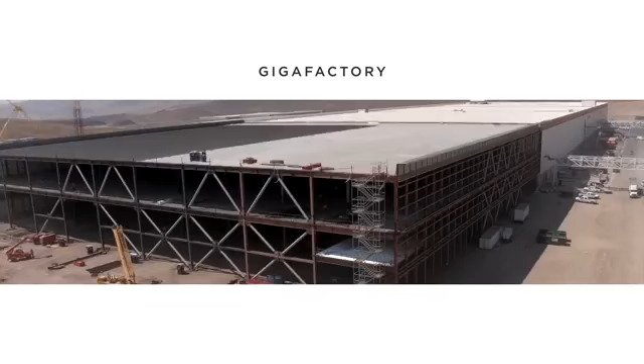The basic math was that in order to make 500,000 cars a year, we would need every lithium-ion battery factory on Earth - that makes batteries for phones, laptops, cars, everything - just to achieve that output. Clearly that's not being built, because you'd be able to see it on a satellite picture. So either we figure out some way to build this thing, or there will not be the cars that are needed. We kind of just said, okay, we got to just start building this thing, and hopefully people will buy into it and start to believe.

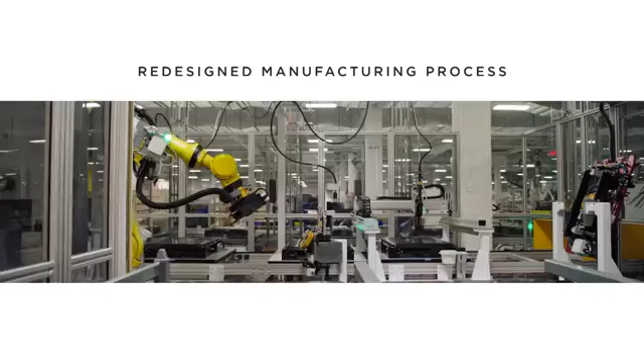That's what we've done with the Gigafactory. We have some of our best engineering teams working on actually laying out the factory and looking at how to fit more density and more equipment into the same footprint. This is really key to how we've been able to reduce the cost of the cells and batteries so much. That intense engineering effort is what drives this improvement.

As Elon said, it's not a copying machine, not just replicating things that have been done before - we're reinventing that battery manufacturing process from end to end. I can't emphasize enough how important this conceptual framework is, because almost everywhere, people just think of the factory as a bunch of basic machines stuck together to produce copies, mostly pulled from catalogs - you get this machine from that company, that machine from another. But if you applied that same principle to product design, it wouldn't make sense. If we tried to make the Model S out of parts from a bunch of different cars, it would be ridiculous.

It would be like a bumper from a Honda, a steering wheel from this, a motor from something else. It wouldn't make any sense to actually make a car from bits and pieces of other cars. You really need to design the car as an integrated product from the ground up. And that's the same approach we've taken to the Gigafactory, and it's really quite unusual for that to be the case.

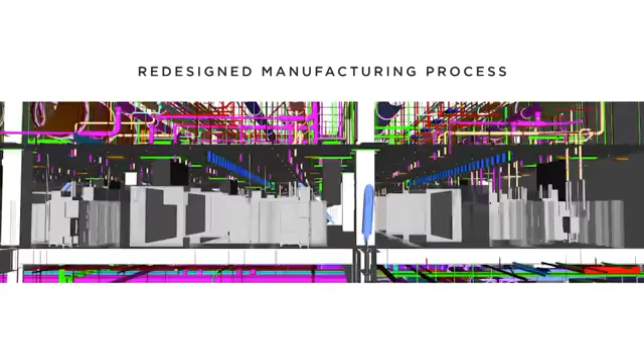So, in terms of analyzing how the factory should work, I'm a big fan of using physics as an analytical framework. Physics is true. Everything else is debatable, and even physics is questionable.

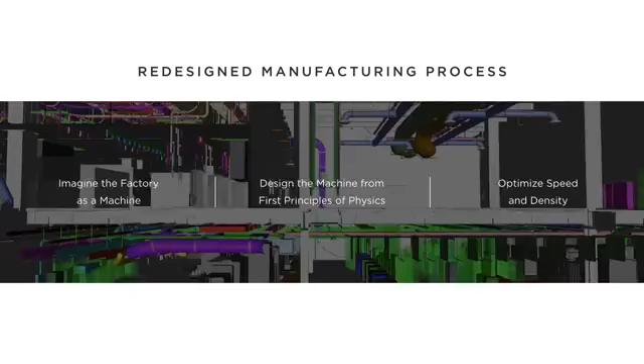So designing the factory from physics first principles means really optimizing the density of the factory. You can think of the fundamental efficiency of the factory as the density of useful stuff - what percentage of the volume of the factory is actually useful stuff versus not useful stuff. And then the output of the factory is the exit velocity of products from the factory.

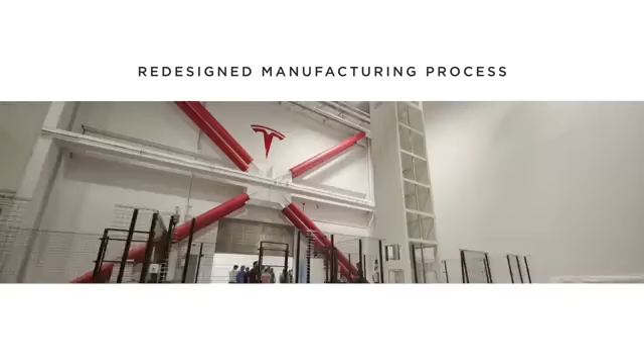So we're actually just applying that throughout every step of the process. We're fairly confident that there's at least maybe a 5 to 10-fold potential improvement in production capability.

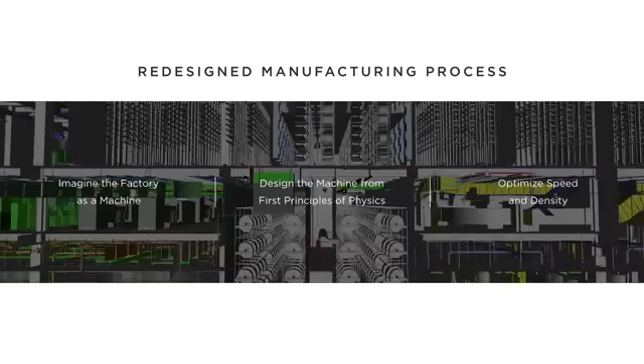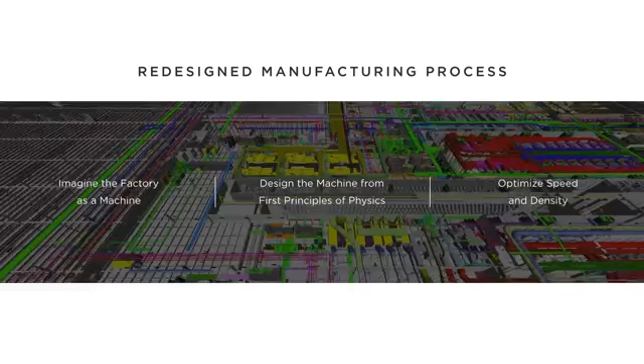This image, maybe some of you can see on the screen, is actual CAD of the factory. Just like a great machine, the entire factory is in CAD - every pipe, every electrical conduit, every piece of ductwork, and every piece of equipment building the cells. We've modeled all that to fit it in with the minimum wasted space. Everything is basically almost touching each other on every floor. So that was necessary to build this amazing machine.

And many factories aren't done this way. They just build a shell and then randomly put equipment in there. But this was very different.

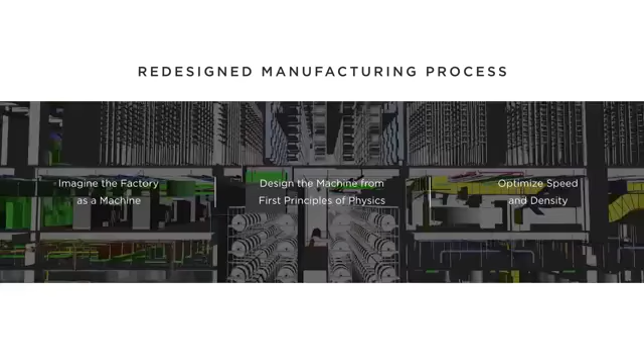It's essentially designed like a very high density, multi-layer integrated circuit, like an advanced CPU, which actually, when you think about it, is obviously how it should be done. I think over time the manufacturing process may look a lot like one of those super fast chip pick and place machines - super optimized for speed and density.

If you think about how we improved the capability of your phone or your laptop, it wasn't by making a really giant computer the size of a table. It was by increasing the clock speed and the density. And those same principles apply to manufacturing. So I'm really excited about revitalizing manufacturing - I think it needs love, and we're going to give it.

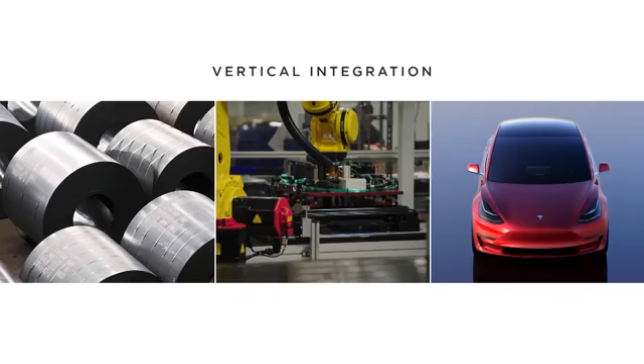We're also expanding the scope of what people typically thought of as a battery factory. We're going all the way from the basic raw materials that go into making up a cell, all the way through to the finished battery packs under one roof in this single factory. Historically, it's gone between a lot of different factories.

Yes, it's a three-step process, which we've outlined for you. All of our secrets are right here: raw material, bunch of stuff happens, out comes a car.

The vertical integration is pretty important because one way to think of manufacturing efficiency is how long a journey did that molecule take from when it was mined. If it was mined in one part of the world, then went halfway across the world to get processed, then back halfway across the world to get processed another way, and does several trips around the world before it finally ends up in a finished product - that's fundamentally going to be expensive. You just can't send things on round the world trips and expect it to be cheap or affordable. It's just not gonna happen.

So it makes sense ultimately for rail cars of raw materials to come in one side, and for finished vehicles to exit the other side. Today it's sort of split up - we've got the vehicle factory in Fremont, California, and the battery factory here in Nevada. But I think for Gigafactory 2 and beyond, we're just going to integrate that into one big facility.

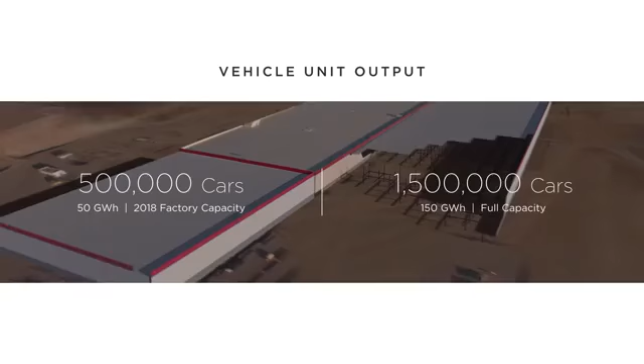But in terms of vehicles, we actually expect to get to 50 gigawatt hours a year of output in 2 years. To give you a sense of what that size is, total global output — I don't know the 2015 numbers, but the 2014 numbers for total global output of lithium ion for all purposes throughout the world was only about 30 gigawatt hours. So this is more than the entire planet produced in 2014. Obviously it was more last year, but still, figure roughly this one factory will produce as much as the rest of the world combined.

And then as we get to a couple years later, perhaps 2020 or thereabouts, we expect when the factory is fully built out — and like I said, where you are right now is the middle of the factory. You're standing in the middle of where the factory will be when it's complete. So we should have another party, I think.

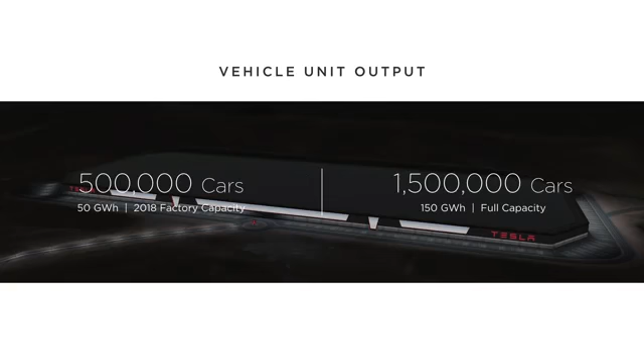And so we figure when it's done, it should be able to do on the order of 1.5 million cars, and also provide a lot of power for stationary storage for battery packs, which are obviously going to be very important to pair with solar.

And all this is happening a lot faster than we even initially planned. With the amazing results from Model 3, we've pulled ahead that 500,000 car target by fully 2 years. So the building you see outside is almost doubling in scope just by next year in order to build those 500,000 Model 3s per year. So yeah, it's super exciting. I actually really love manufacturing. It's great, more people should get into it.

Part 2 of the master plan. There are 4 parts to it: to make beautiful solar combined with battery storage, to expand to all of the major vehicle segments in order to, as quickly as possible, move us away from oil, and to get to a self-driving capability that's about 10 times better than the average driver. That's a lot of lives saved — 1.2 million people die a year in auto accidents, so that's a lot of potential for lives saved there.

And then the ability to add your car to a shared fleet whenever you want. So whenever you're not using your car, you'll be able to just tap the Tesla app on your phone and add it or subtract it to the shared fleet. And you'll be able to define who can use it — like only 5-star users, or anyone, or only family or whatever. And whenever you want it back, you can just tap it and it will return to you.